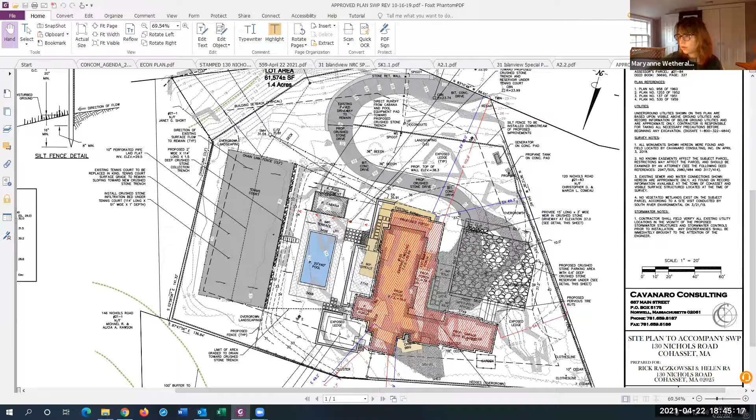What part of the porch and house was removed in the 900 square feet? Pretty much in this area, the house got narrower and a little bit shorter from this end, but it's essentially around the entire perimeter.

And you're also asking for a new well as well? We're applying to the Board of Health for a well, that's correct, for irrigation.

John, on your previous application, you showed the 2 beech trees which have been removed. There also is a tree line right where the well is being shown, which has been - that area has been cleared. And there's also a large swath that was cut, I think for electric, although it must be the biggest electric line in the world because they cleared about a 40 foot wide path through there, which we don't have any record of trees on that slope. Do you have any record of the trees that were where the well is?

I can actually defer to Sean to talk a little bit about the landscape. Sean, if you're there - yeah, I'm here. Sean Papich, Sean Papich Landscape Architecture, 222 North Street, Hingham.

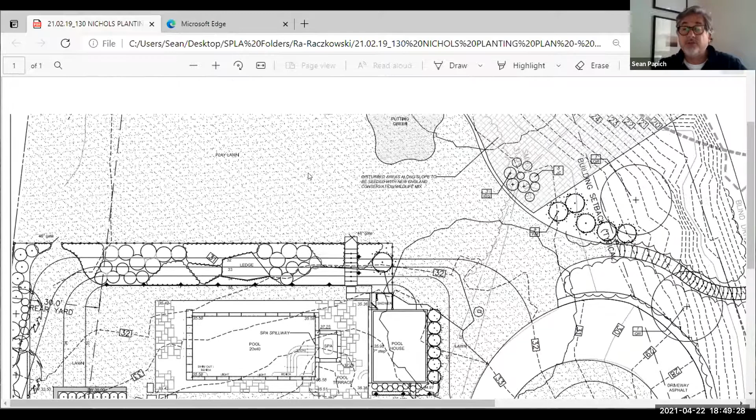We have a heavy amount of vegetation we're placing between us and the neighbors downhill, as well as plantings, and I can also jump to some of the other plantings we're doing around the house. This particular plan covered areas that were primarily around where the old tennis court was. The intent was to show some of the vegetation going along the hillside, where some dead trees were removed and some invasives were removed.

There were some Norway maples pretty close to the street that we met with Andy Swanson, the tree warden, about, and he gave us a go ahead to remove a few of those down near the right of way.

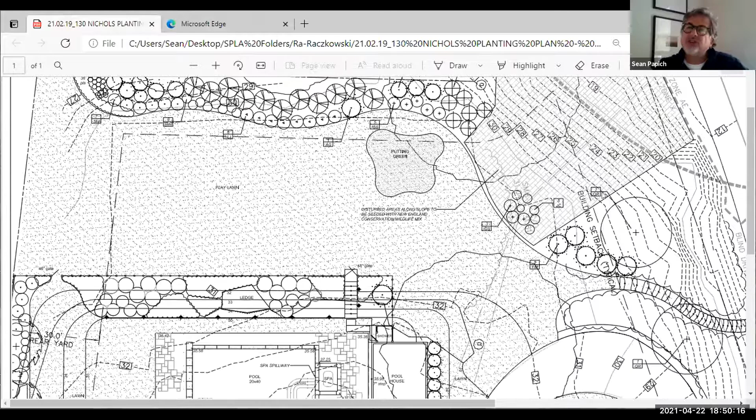We were actually going to vegetate this very heavily with native grasses and wildflower mix, as well as other shrubs. We're also going to add back red maple and two red oaks into this little area. You can see some of that along the driveway.

Existing driveway, as John said, stays generally the same as what it is today. Any areas that are disturbed right on the edges are going to get revegetated.

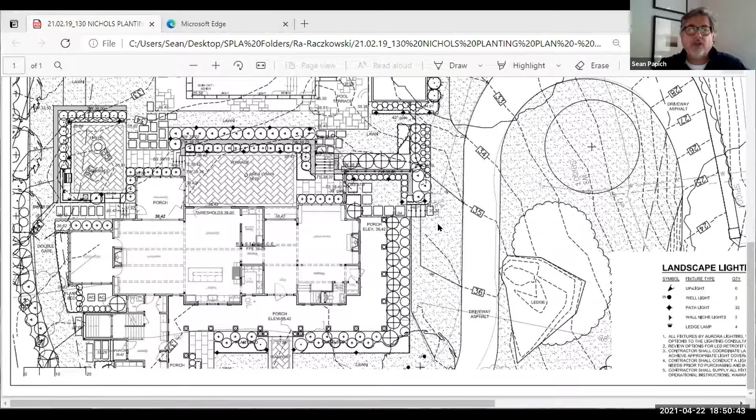Speak to - you wanted to look at the other plan that we've got that is right around the house also. See if that comes up.

That's again where we were looking around the pool area. The tennis court is up top. Sean, just to interrupt you, you may have to back out and come back in because we're not seeing the second plan. How about this one? See it now? That was the first one. Yep, this is the second one now.

Okay, thank you. So this is where it gets cut off. There's a lawn area now instead of the tennis court. And to the sides of the pool in this flatter area, we've got this heavily vegetated slope.

Vegetation around the house - I'm not sure if you really want me to get into a lot of specifics of the vegetation right around the house, but it's typically right around the house. And we'll see if I can show you.

We were going to add some more plant material along the buffer right here. So you can see where we're going to add vegetation along these edges. Existing tree that stays here, other existing vegetation along this edge.

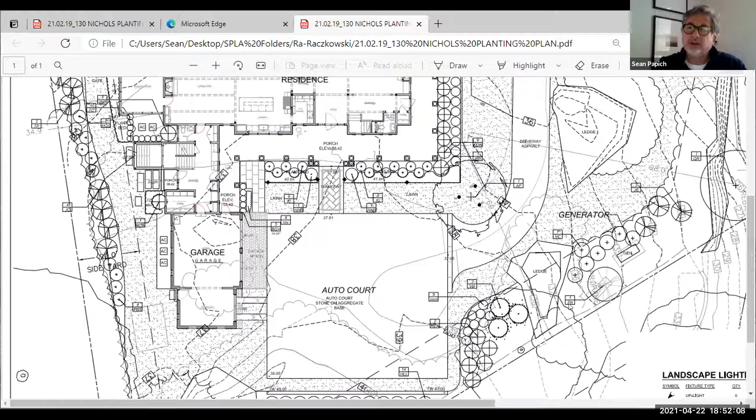Again, Chris, I think you were talking about where the well was proposed is right here. Yeah, I mean, my comment really goes to the vegetative buffer between the house and the road, which has been disturbed considerably.

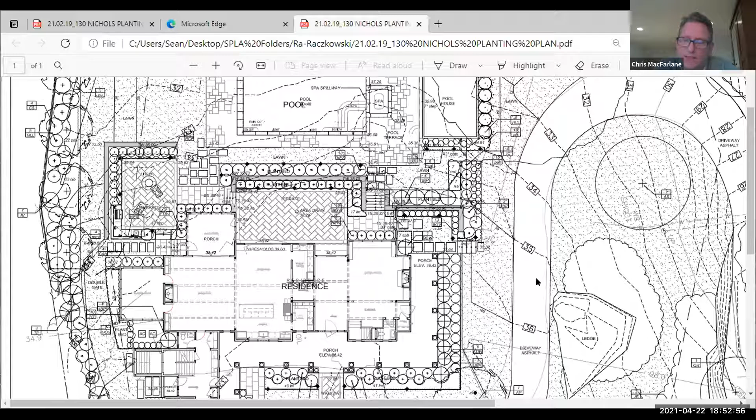There are signs that front edge has all been blasted. You're showing a tree line there, which doesn't really exist anymore because it's all been blasted out. And I think if any area this property needs to be properly vegetated, it's that particular face.

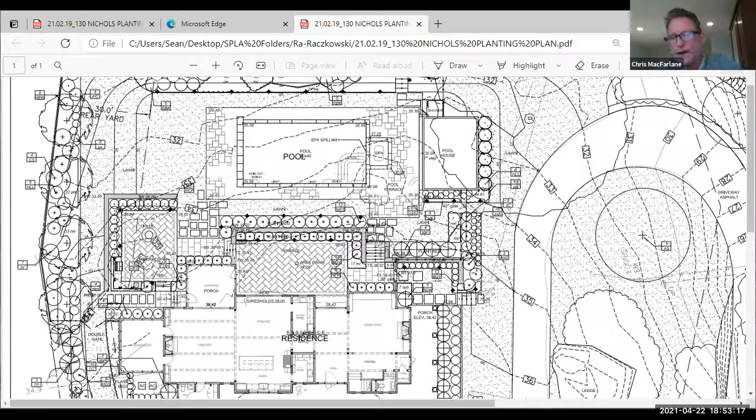You know, the original permit had the beeches. I understand the condition they were in - I think I even mentioned to you at the time you shouldn't count on them. But you've lost those, and as I said, it was an amazing swath that was cut for what I believe was just electric. I may be wrong, but I think for sure that attention needs to be paid to that, and that's just the comment.

I'm going to kind of leave it at that. Oh, I agree, actually. I do believe we should come back in here and add some additional vegetation now that the electric came through and created kind of the large void that's there. So I do agree with you - we would intend to come back in and revegetate along this front side now that that's happened.

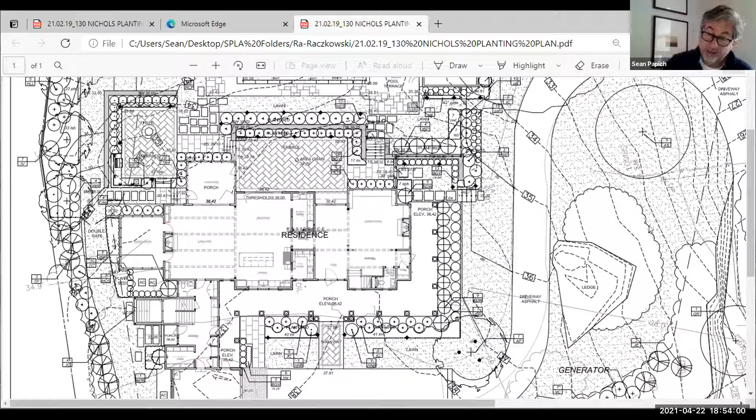So, John, going back to - I'm sorry, I shouldn't jump around, because if other people have questions about landscape, I'd like them to have it. But after that, I'll jump back to the stormwater again.

Do any commissioners have questions about the landscaping? No, thank you.

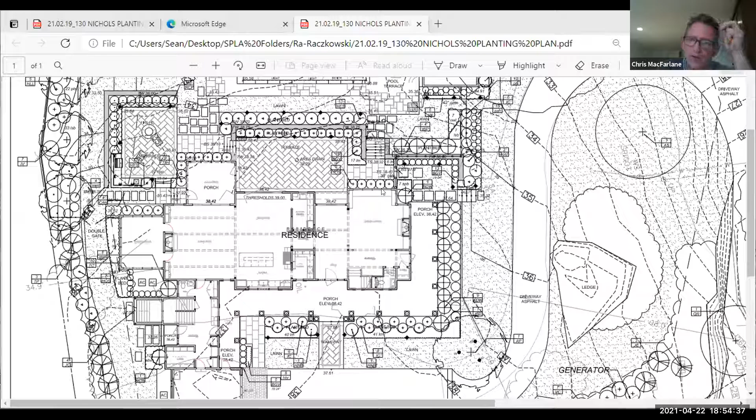So, John, my question is this: the area of impervious surface has changed from the east side of the property to the west side of the property and the south side of the property where the entry road is. Can you explain where the stormwater is now going?

As you recall in the first application, the intent was always to try to reduce the amount of overland flow that sheeted off to the north onto the adjacent driveway that flowed down towards the wetland offsite. So now we'll maintain flow toward our property. We're going to have a series of catchment points at the low point between that vegetated buffer that Sean mentioned at the pool and the new lawn area where the tennis court was. That will be graded towards the pool, captured with some yard inlets, and then go through an infiltration system and then continue to flow and connect to a catch basin in Nichols Road, which is what we always intended to do after talking to the town about making that connection.

The idea is to reduce the amount of overland flow and sheet flow rolling down the driveway and coming off the site and over the ledge. Similarly, the house will be captured and sent to this infiltration system in the back, and the front half of the house will run to a series of manholes that will then connect and flow down to the offsite catch basin. So essentially, there's a large reduction in overland flow, and what's now being channeled to both a piping system with an infiltration area at the toe of the slope, and then on to the catch basin offsite.

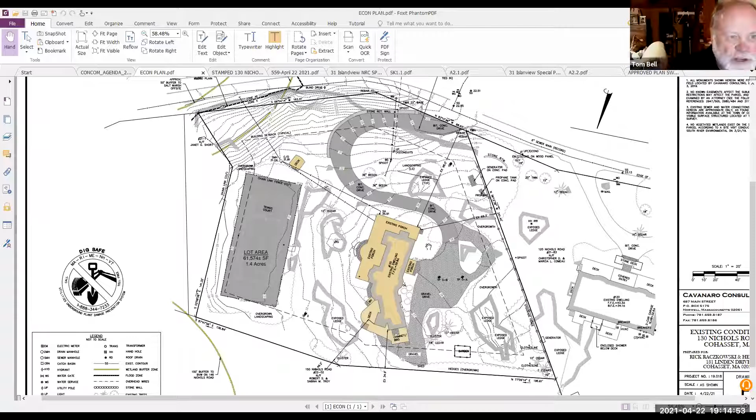How many square feet is this? I can't see it on there. I'm just wondering about the residential area of the house itself, or even the footprint. It looks like a big house to me—it's larger than most homes that seem... it's a large home, like a lot of homes in this neighborhood.

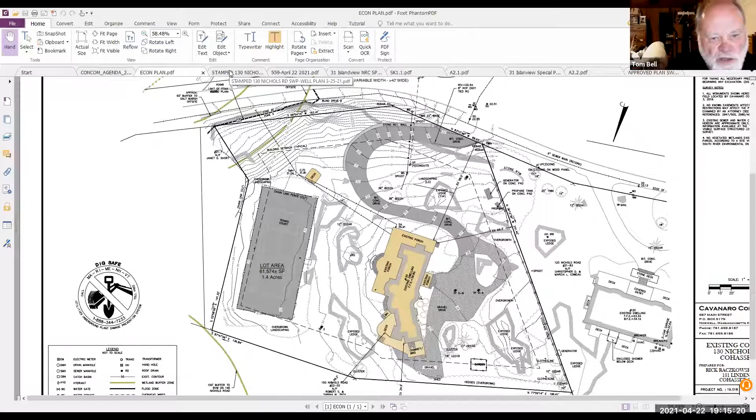Has it gone through large house review? Yes, it has—we're talking about an amendment to the stormwater permit. It was approved in 2019. I'm not asking whether it's approved, I'm just trying to get some notion of how big it is. So if it's gone through large house review, it's bigger than 3,500 square feet, right? Yes, that's all I'm trying to get at.

John, I understand your contention that the bylaws ask for a reduction, and I understand you've met your burden. They don't ask for a reduction, they ask for no increase. All right, fine, that's important. Because if you read our bylaws, it talks about all kinds of things like on-site disposal and everything else, but we don't really push that—we do look for no increase. And I've just acknowledged that to you, John, so don't get pissed at me, all right?

I'm not pissed at anybody. You're completely pissed off, you showed it through your voice, and now I'm trying to just ask a very simple question. I'm not upset, I apologize. There's a swath—well, I am, okay?

This happens every week. Whoa. Listen, come on, guys.

We've got a swath that cuts through this area. I have no idea how big a trench this was. I'd like to recommend, if it can help, a break in this grade with potentially a gravel infiltration trench halfway down that might infiltrate some of the water people are concerned about running off the property. I'm not an engineer, but I've seen it done before. It's a completely barren piece of land. It would take a half hour to dig a trench and put gravel in.

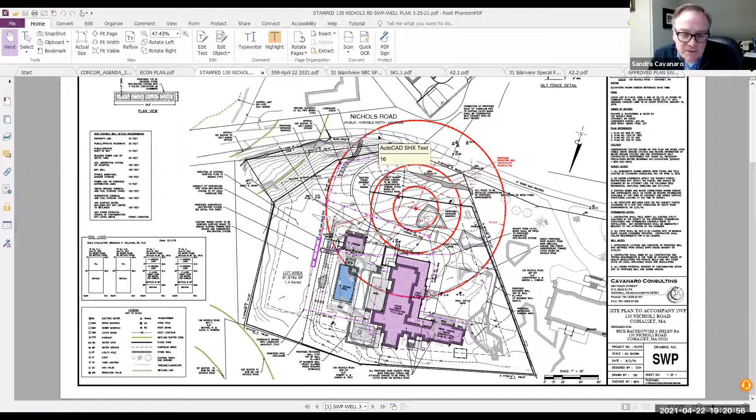We understand that, and we'll state publicly that we will endeavor to do that without hesitation. I know Helen and Rick are anxious to keep things moving. Quite frankly, we thought the removal of the tennis court was a good thing that would be looked at favorably, but they really want to keep things moving, so I'll speak for them and say we'll continue to work in that regard.

Chris, are you suggesting a driveway trench system by that? No, I'm not. I'm not anywhere near the driveway. I'm talking about the area that was disturbed for the electric line. There's a major slope right here, and if anything can be done to help intercept the water as it goes down, I think it could be a great positive.

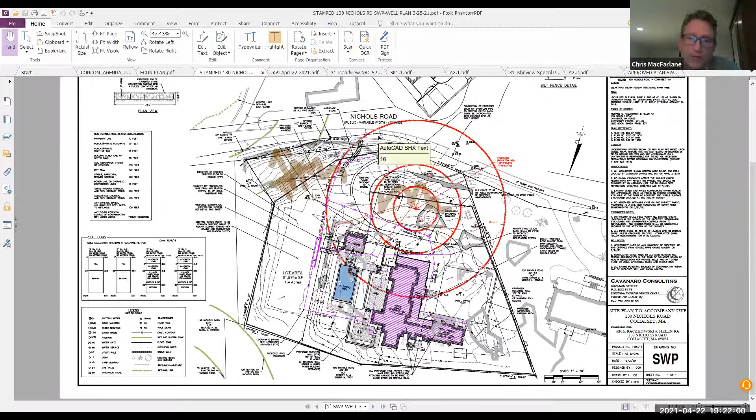I think this area here and this area need some serious vegetation. Those are the two items that I think could really help this project, and I think that could be done. Neither is required, but I highly recommend them.

I think that's possible to do, Chris. I don't think that's an issue at all, especially if it was going to be vegetated. To John's point, if there's something else we could do, perhaps capture some of that water with some crushed stone within that planting area we're already going to be planting. And the disturbed area coming straight down from the house to the street, if we're revegetating that, we can do it at the same time. Yeah, shouldn't be an issue at all.

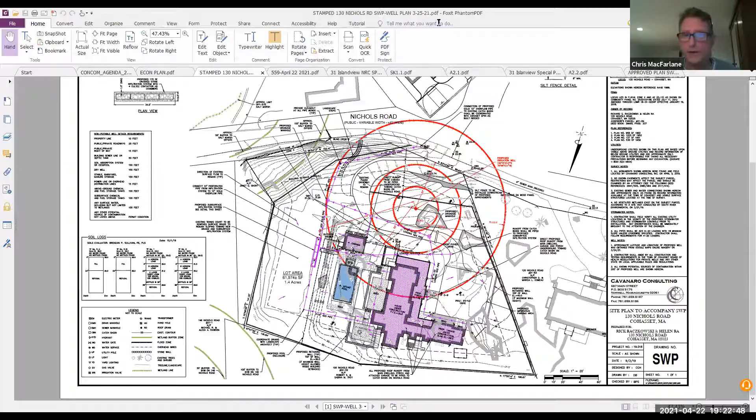Jeff, is there anyone in the audience who's raised their hand or asked to comment on this? No.

I will say that we did meet with the downstream abutters last week to go over the plan with them. They asked us some questions, and we offered to go out and meet with them in person and walk the site and explain the plan, and they appreciated that. Does anyone else have any further comments?

Jeff, this would just be a motion for an amendment to the stormwater permit, is that correct? Yes. Would it carry an order of condition for what we're asking, or just? It's not really an order of condition because we're not conditioning it. We're recommending it. It's an order of recommendation.

Would someone like to make a motion to amend? Mary Ann Weatherall would make a motion to recommend amending the stormwater permit 1923 at 130 Nichols Road, that we amend the plan, and that the applicant has agreed to make some modifications to help reduce runoff where possible, and that the plan can be shared with our conservation agent at some point.

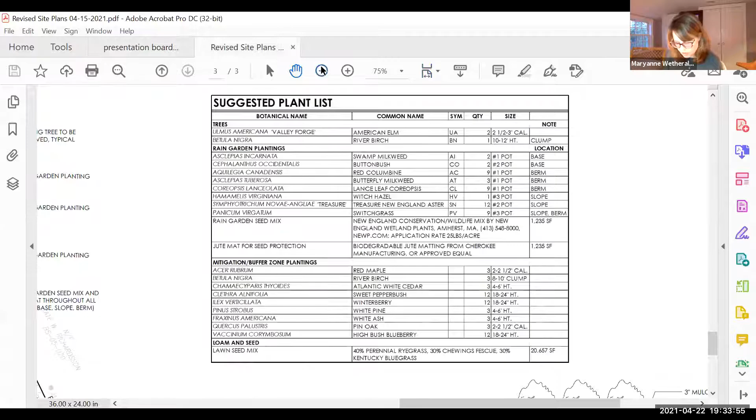All right, thank you. Maryanne, you're saying those do not show up on the existing condition plan? They do now. I believe on the initial plan that I had, the existing plans I had before, I couldn't tell if it was there or not because everything's so lightly drawn, or maybe it printed out from my document. But I just wanted to address it if I had seen it.

But you say there's only 2 trees coming down? Can you guys see this plan now? Mature tree. Okay, great. There's a 36-inch pine here, a 36-inch elm, which I think is mislabeled, that should be an oak. And then there's a 48-inch pine there. So those are the main ones that would be removed. Wait, that's in the 50, so that would stay. So it's mainly the 36-inch pine, 36-inch oak, and then there's a 24-inch oak there.

And this clump here is the birch trees that you had spoken about. So the 12-inch birch, the 12-inch oak, and the other 12-inch oak, and the 56-inch oak are all staying? No, those will be removed as well. I was just speaking to the larger ones. The 56-inch oak is outside the 100.

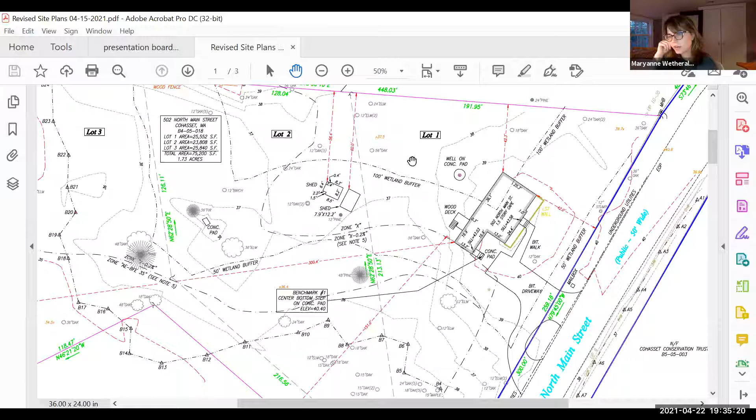With the concrete pad that you say is there, what is it like when you're out on the property? It's concrete, yeah, it's just a remnant concrete pad that was there. Maybe it was a dog kennel at one time, but that would be removed. Okay, so the house is behind the concrete pad, looking at this drawing. Right, looking at this drawing, the house is in this area right here.

Thank you. So there'll be hand removal of all the trash as well, and the tires that you're talking about as well. Yes.

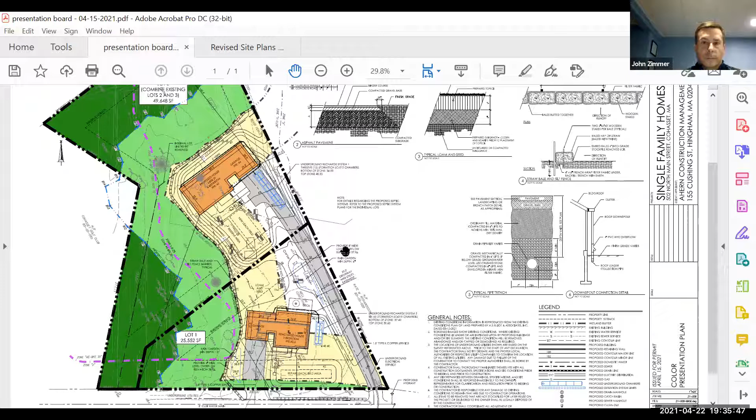Another thing, I just wanted to be clear, are you using the existing driveway as the new driveway? There's a driveway that goes to the right of the current little house, and then it travels to a house in back. Are you using that driveway and then splintering off from it, or are you establishing a new driveway? Let me just double check here between the two plans.

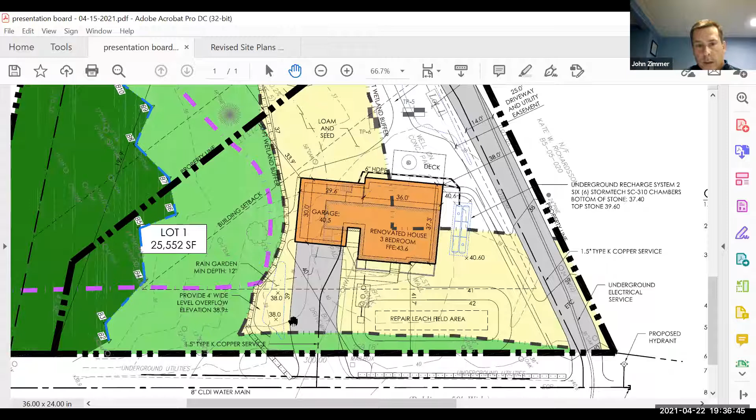So there's an existing driveway that basically has this little circular bump out. No, there's a driveway to the right. So they'll use the existing curb cut for the new driveway. Which is to the right of the north? Correct. So see this right here? That's the existing driveway. So it's oriented differently, but they're going to use the existing curb cut and basically discontinue that other circular part and remove all the pavement that's there.

And then the house in the back - I think she's asking if the house in the back is going to have a separate driveway. Oh, I'm sorry, I misunderstood. Yes, there will be a separate curb cut.

So if we look at the macro view of this, where's the other driveway? There's another driveway right next to the proposed driveway. So where does that line up? Okay, so this driveway here is the existing curb cut, and then there'll be a second curb cut at the edge of the lot. And then, I think she's asking, the next house has its own driveway on the right side of the property line?

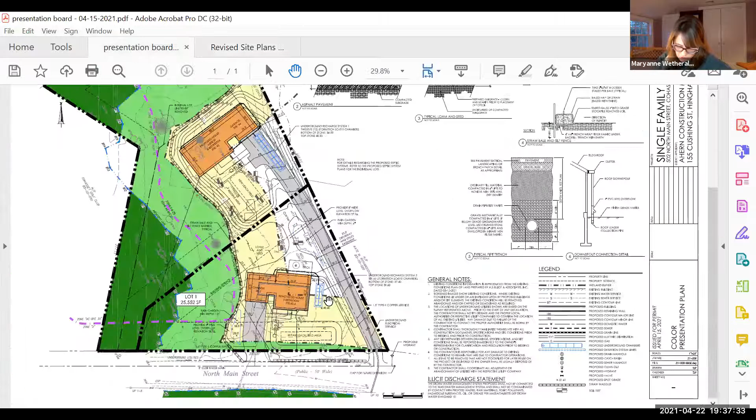I believe so. I don't know that I have... left side, I don't know if we have anything that shows it. Yeah, I'm not sure that that's shown. I'm just curious, is that driveway right next to your own driveway? Because then that's two pervious or impervious driveways right next to each other on a property.

Right, it may be, but the vast majority of that driveway is located outside the 100. I mean, there's a little piece here that's within the 100 right towards the end of it. But aside from getting an easement or some other alternative access agreement with the abutting landowner, they're hamstrung to some degree with access. And we didn't want to propose it over here because then it would be within the 50-foot.

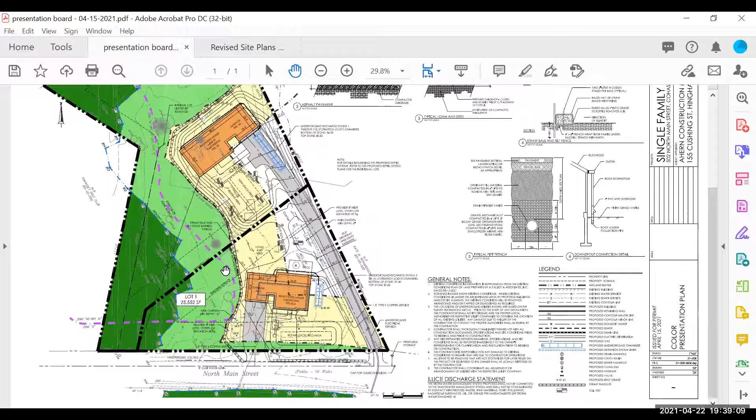Thank you. You're welcome. So could we have a look at the landscape plan?

Is there anything in particular you'd like to zoom in on? Just a general overview would be nice, but I'll tell you where I'm coming from. A very quick look at that existing condition showed at least 7 fairly sizable trees - 3 were at 12 inch and then 24, 56, 30 something. Those are all sitting between the 50 and the 100-foot buffer. So I'd like to see what's being proposed to mitigate for those, replace those.

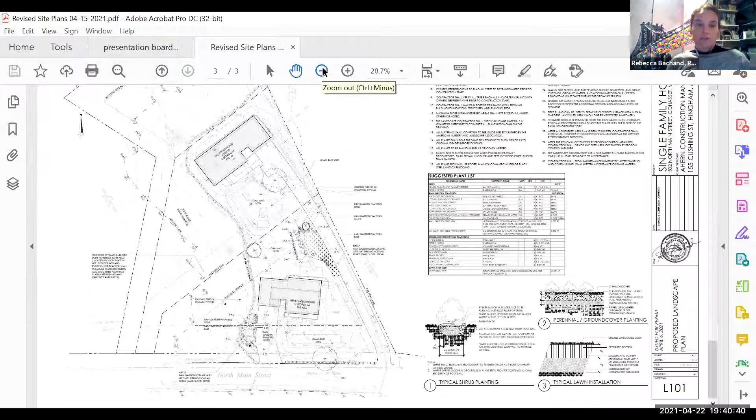Okay Rebecca, would you like to go over the plan please? Sure, for the record, Rebecca Bachand, RBLA Design. I'm a registered landscape architect helping out with this project. Because they're single family homeownership, we really wanted to keep the palette fairly limited because we anticipate the homeowner will want to do their own landscaping in addition to what we put. So that's why a lot of the disturbed area is simply a clean slate of lawn for them to work with. We did propose the 2 rain gardens with a rain garden palette of seed and a mix of shrubs and perennials.

That'll be native and tolerant of getting wet feet, and everything on the list, I believe, is all definitely native, and they primarily come from the Cohasset South Shore native plant list from your website. We proposed 2 large American elms and a large river birch within the residential area, and then the rain garden plantings, and then within the mitigation buffer zone plantings. That's where John mentioned earlier, we increased the size pretty dramatically of what we were showing before.

So now we're showing 3 2-to-2.5 inch red maples, 3 8-to-10 foot clump river birch, some Atlantic white cedar, 3 white pines, 3 ash, and 3 pin oak, and then a mix of native shrubs to infill this area, which we feel we'll just field locate with John after the cleanup and the invasive removal. So I think that'll let us interweave and not affect the existing trees out there.

Rebecca, given the disease issue with American elms, I'm just curious why would you recommend those? Because now we have some newer cultivars that are actually doing pretty well, so we had chosen that. I had red maples at first, but when we decided to put those out in the 50, 100 foot, I noticed the American elms on your list and thought we could go with one of the Princeton or Valley Forge elms. If the people I talk to certainly would not give the American elm a clean bill of health now, and there's so many other trees on our list you could substitute.

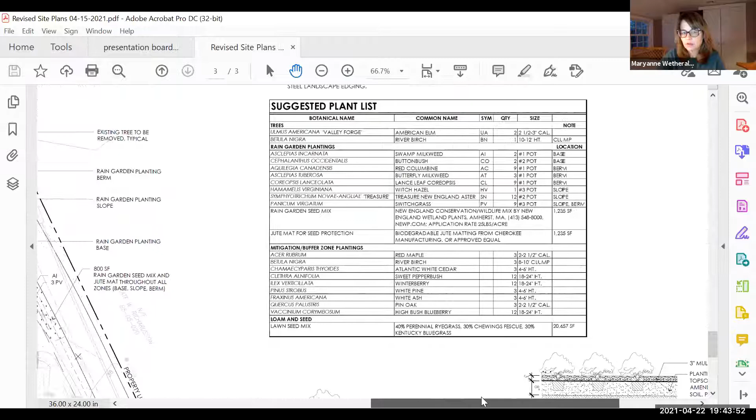Rebecca, what size are these trees that you're putting in, such as if it's not the American elm? I am concerned that you're taking down these two ancient oak trees. They look like they're in good condition on the lot. Yeah, so as shown on the plant list on the landscape plan, we have 2.5 to 3 inch caliber deciduous shade trees, a 10 to 12 foot height river birch.

Right now we just have the 3 in the residential area, and then down in the mitigation zone, we have 3 2 to 2.5 inch red maple, 3 8 to 10 foot height clump river birch, 3 4 to 6 foot height Atlantic white cedar, 3 4 to 6 foot height white pine, 3 4 to 6 foot height white ash, and 3 2 to 2.5 inch caliber pin oak, with about 3 dozen 2 foot height native shrubs.

Those aren't located on your plan though, are they? No, that's what I was saying. We will field locate them with John Zimmer as we do the invasive species removal. That way we won't impact the existing trees that are out there. We don't have a survey really showing what the understory might be. If there's something of value, we don't want to just put a shrub on something that's good and have someone not thinking rip out a great native species.

So these would all have to be hand planted. There'd be no machinery into the 50-foot buffer with these. Right. Okay.

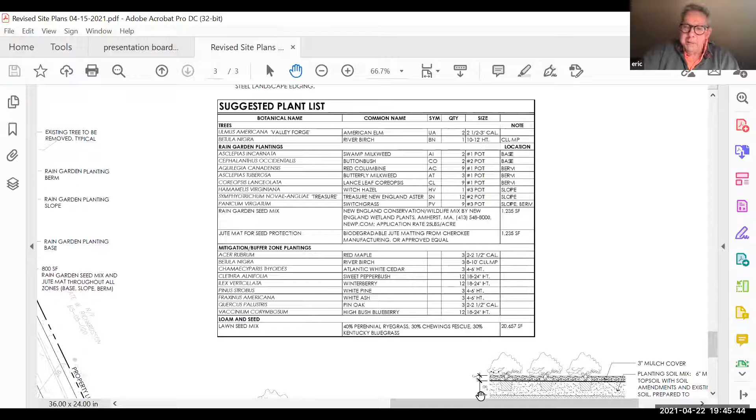Rebecca, I think maybe I missed your discussion on this. All the large trees, more than 18 inches, are they coming down because of the development work you're going to do? Yes, they have to come down because of roads, buildings, or construction. They're not coming down because you think these trees are not needed or not wanted on a new property like this, right? I'm always in favor of keeping trees, but because of the underground I just wanted to make sure. That's great. Yeah, unfortunately because of the underground stormwater and septic.

That limits us a lot, and it has such an impact to dig that much near the root systems of the trees. But that is also shown, the tree removals are shown on the landscape plan now as well.

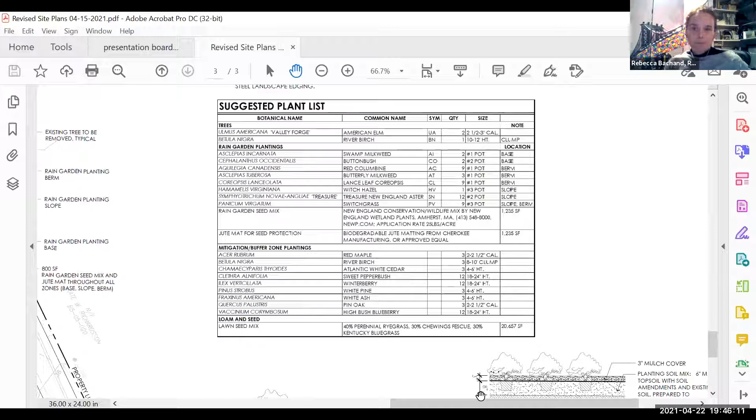All right, can you go to your plan again, please? Yeah, don't go out too far though, please. So the X's represent the removals? Yes. What size are those, Rebecca?

They range, I think the surveyor actually picked up 4-inch and higher. So they're 4, 8, 12-inch, and then the few really large ones that John mentioned. So I think that's where I have an ancient oak, I have a black birch, which I agreed to take, I thought was recommended to take down. I had an old beech tree and a stand of beech in that area. It just seemed like a lot.

Yeah, I think that's unfortunately because a lot of them are located in the septic systems for the houses. So that's why they're being removed. I'd like to see some more trees put back then.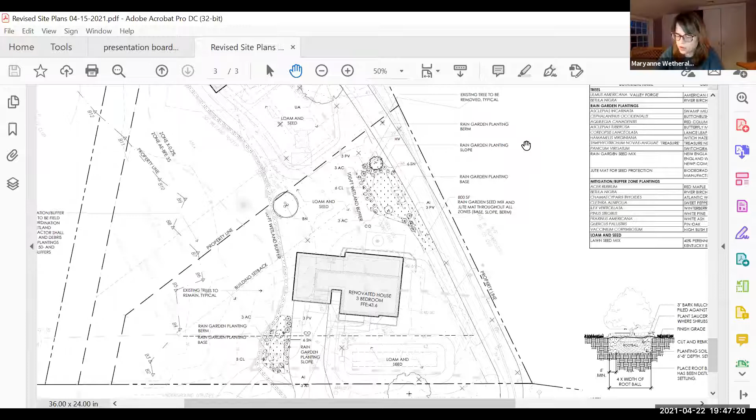Yeah, but that was a 56-inch, or at least labeled as a 56-inch, which is quite a tree. Right, but there were some of the larger trees that were multiple trunked, and I think when the surveyor was out there, they just kind of wrapped around all of the trunks and called it a 56. But there are definitely some sizable trees out there. I only saw one tree that had 3 trees attached to one trunk. The rest of them were single trunk, large, very mature trees.

So I would like to see some trees replaced, not of course in the septic system, but on the property. I think that's exactly why we added more larger trees, because that's what was said in the last meeting. And we represented that with Rebecca coming forth in this meeting.

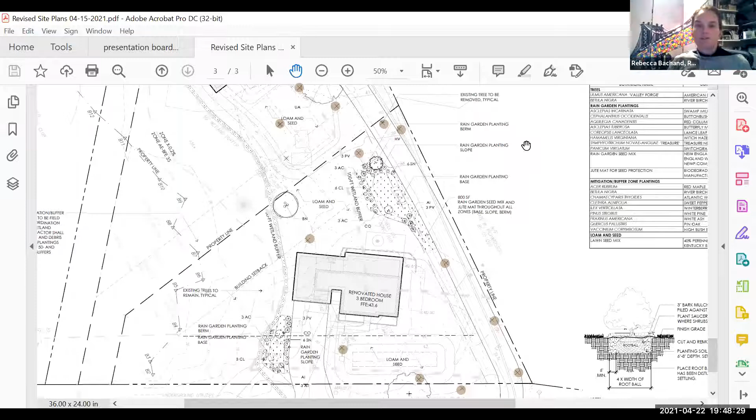So you're asking for additional, more than the last meeting? I think that would be recommended, yes. Is there a threshold you're looking for? I didn't see any mitigation requirements in your bylaw.

I'm sorry, before we answer that, can you slide down the page? I know my dots aren't going to move with you, the other direction. I'm sorry, I wanted to try to see what we had. Sorry, I'm going to clear this. I had 13 up until some point.

I don't think we had 14, so it's 50 foot, and then 15, 16, 17, but yes, several of those are outside of the 100-foot buffer. So this one, this one are all outside the 100. These two. No, we understand. Okay.

Chris, is that you putting the dots down? It was me putting the dots down. I didn't know where they came from. And it's me messing them all up after he put them on there. Sorry, no, I had put them down, and then when the page moves, they don't move with it.

I believe I counted 18 trees coming down, even though some of them are outside the 100-foot buffer. If you said two-thirds of those are within the 100 to the 50, I think that's a fair number for what we'd want to see.

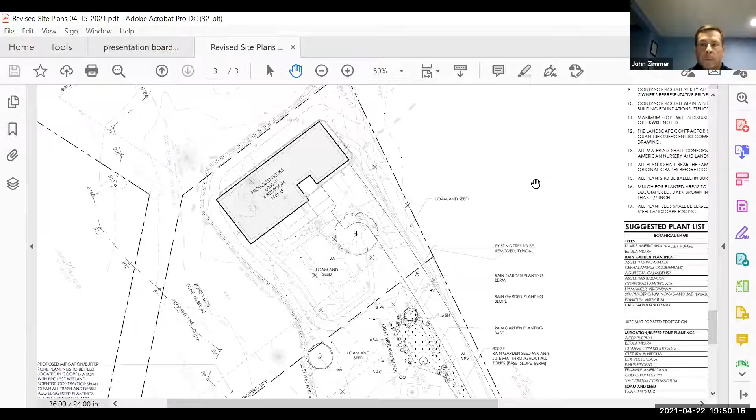Well, you're pretty close to that, I'd say, right? Rebecca, I think there's a total of 21 trees being proposed. 21, okay, right, so you're pretty good then. Lucky for you. 18 coming down and 21 being replaced.

I believe it was 23, isn't it, Rebecca? Oh, you're putting me on the spot. Wait a second, let me add. 18, 21. Yeah, and that's what we heard in the last meeting, and that's why we added more trees and larger trees.

We have a large overgrowth in the wetlands as well that's shading the lot, so we also have to take that into consideration. Right, you are keeping the pine that's in the 50, aren't you? Yes, nothing's being proposed to be cut in the 50.

Rebecca, you said Cambridge has what kind of plan? Cambridge's mitigation bylaw is pretty strict and to the point. It's inch per inch replacement for every inch you remove, or you pay a fee if you can't fit the trees on your property. They have a very specific payment plan.

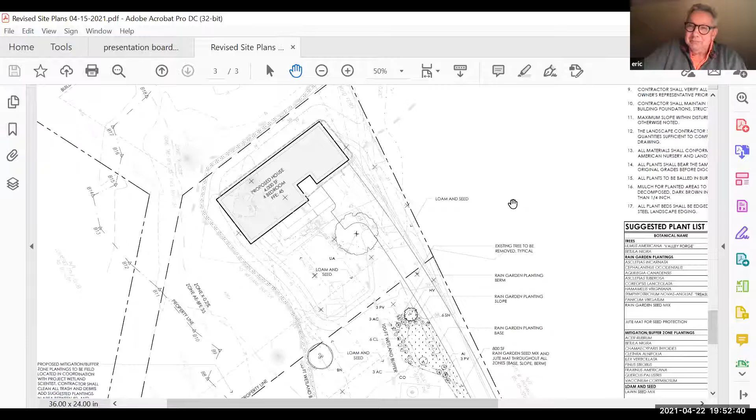I would hazard to say that yes, you are putting back trees, but they took 100 years to get to hundreds of inches, and we're putting back 21 trees that'll get to hundreds of inches probably much sooner than the previous trees did. Not in my life. Probably not in my life either, but probably not a good argument right now. And today's Earth Day, so in celebration of that, I'd probably like a little more trees.

All right, and we have no comments, Jeff, doesn't look like we have any other comments. No. All right.

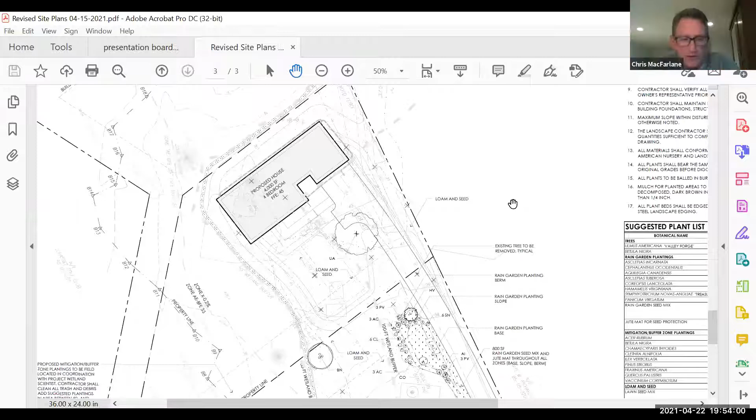Thank you. I think the only real order of conditions we heard is Eric's recommendation against the American Elm. I'd also like to add, Chris, as a condition that they make sure there's a cleanup of the 50-foot buffer zone, and that if they want to come in and remove any invasives through chemical means, they come forward with a plan that we have to approve.

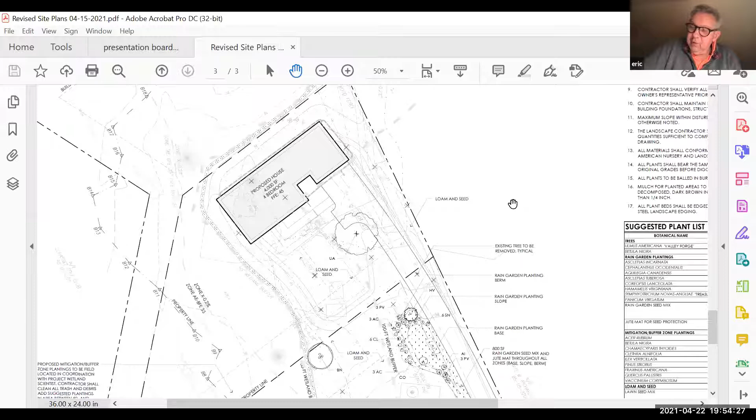If you think that's necessary. That's great, that's great. So we'll add that to Maryanne's motion. Do I hear a second?

I'll make a motion to issue a variance for work within the 50-foot buffer for the cleanup and mitigation planting, which shall all be done by hand. Do I hear a second? Second. Having heard a motion and a second for a variance for work within the 50-foot buffer, we'll take a roll call vote. Kathy Berrigan, aye. Eric Eisenhower, aye. Trish Grady, aye. Maryanne Wetherall, aye. Chris MacFarlane, aye. That vote passes 5-0.

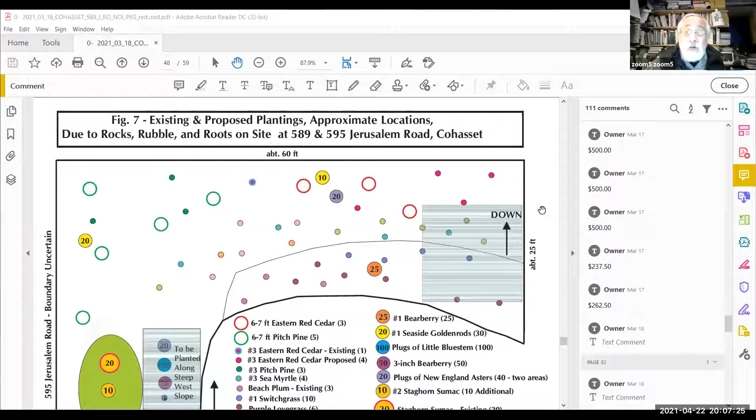Can you see that? Yes, we can. So this is a compendium of all the existing and proposed plantings with their approximate locations. Took us hours to put this together, with very different colors for everything.

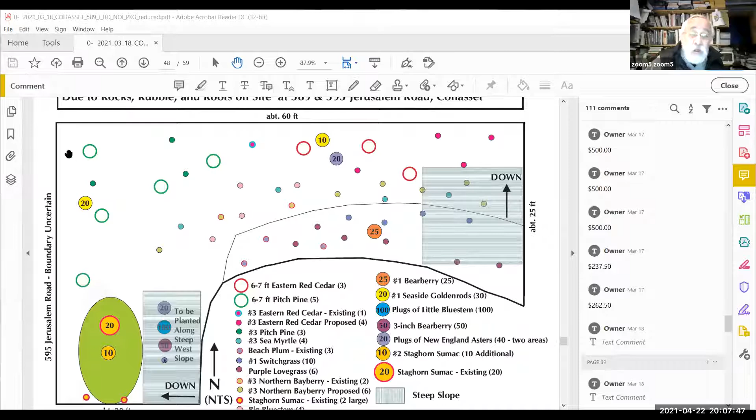So the easterly side is very close to the stairway over here, and the westerly side is on 595 Jerusalem Road. We don't have a location for the boundary line, I'm sorry to say. But you can go out there and see what's existing on that site right now.

You've got a lot of staghorn sumacs in this area. And then if I bring this other one over, the dark blue are living black locusts. There's some living staghorn sumacs, the green, and the dark blue are all what we want to get rid of, including other invasives like garlic mustard, mugwort, and the multiflora rose, of course.

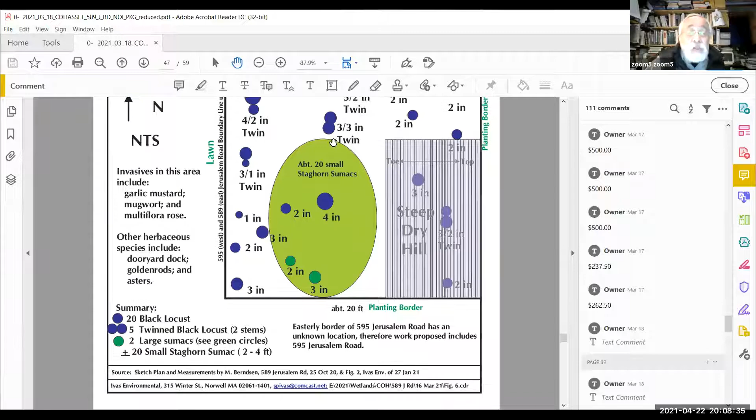And we'd like to put back what you see here. Do I have any questions? Steve, could you move your hand back and forth and tell us where the end of the riprap is?

Are you talking right next to the pond? So where your hand is the pond. Now, what about at the top of the bank? Top of the bank is right here. But it's not shaped like that, the planting area is shaped like that. It is, it's shaped very similar to that.

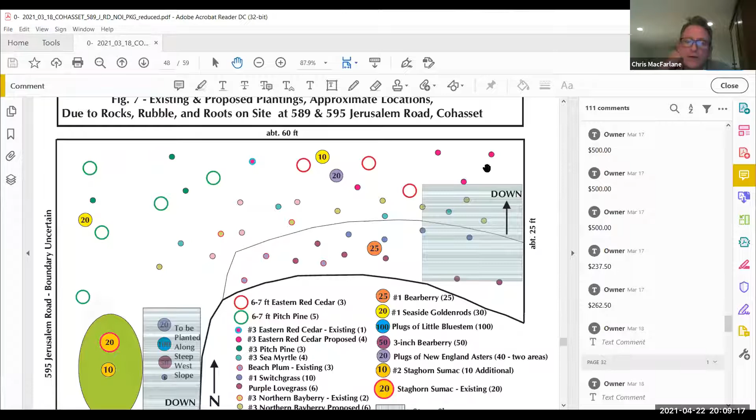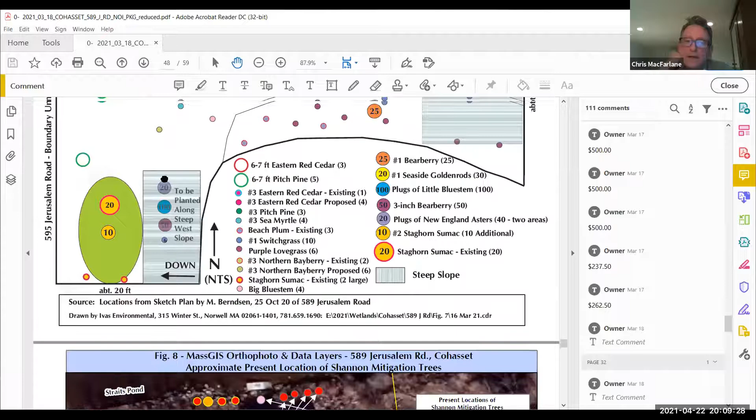So we're only talking about the north end, is that correct? This is the north end here. Okay, and it's about 60 feet. Let me think, it's 20 feet this way, and it's about 60 feet on this line here. So this goes right back to probably even with the garage, the stairs.

You know where the stairs are going down? Yeah, this is probably even with the stairs going down or thereabouts. Going down to the lawn. This area is lawn and rain garden right in here where my cursor is at this location.

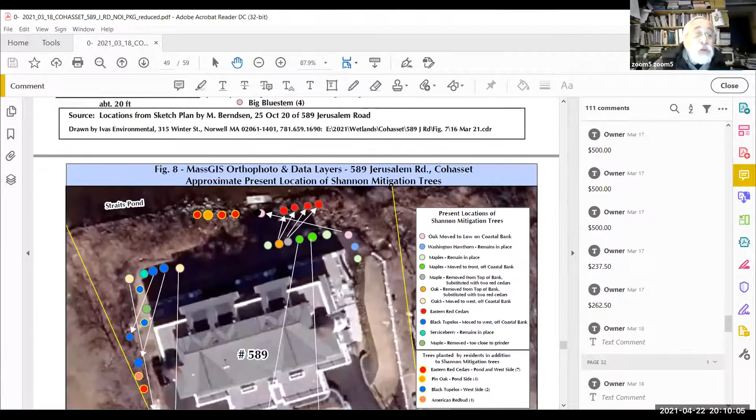In fact, I can probably show it to you over here a little bit better. That's that area right in here. And here, actually, here is the rain garden right in here, I believe.

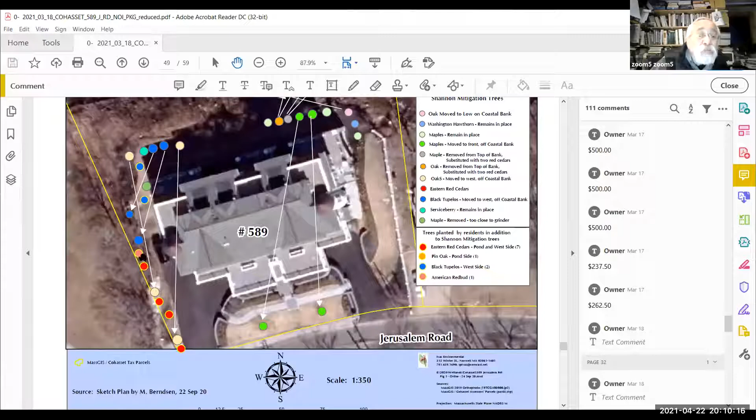If that assists. Steve, are you going to retain those staghorn sumacs? Yes, absolutely, why not? It's fantastic. Are they a native? Yes. Yes, they're very good wildlife food too.

These are the ones that have a great big red crest on them in fall? Exactly, yes. And if you find a bunch of them around, it's amazing, you'll see a very large one in the middle, and then you'll see many, many root suckers around them. Okay, that's how they grow on the highways. Yeah, that's how they take over the world. Indeed, I have some in my yard too, and I'm letting them grow.

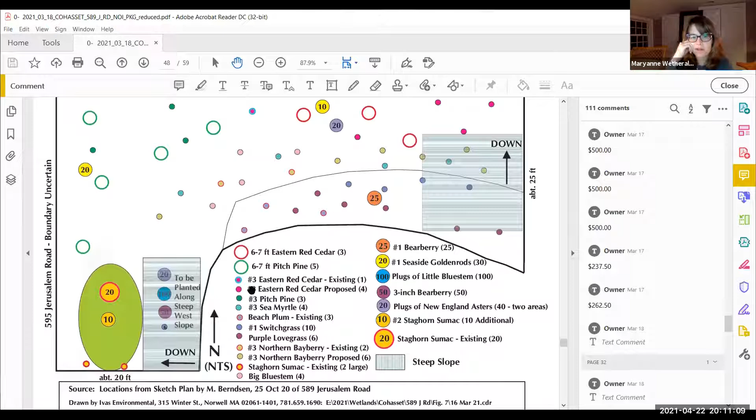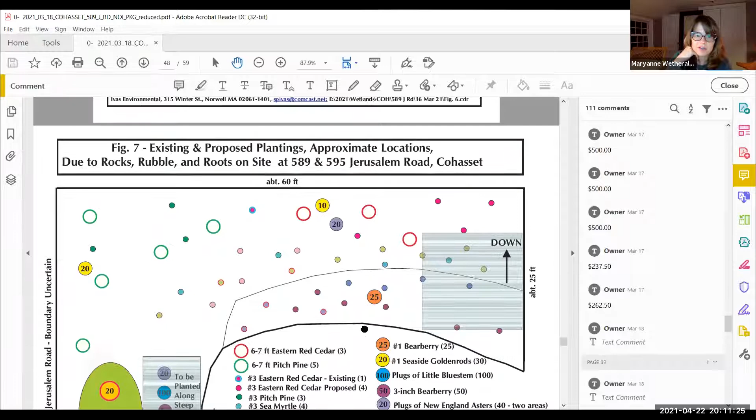Steve, I'm having a little bit of problems with your drawing. The drawing we're looking at right now, where is the house, where number 10 is about? Where the condo building? Yes, that's correct. This right here, number 10. Yes, oh right, no, I guess at the top of the page there's a 10. Right, the top, right there. Is that where the condo is?

No, that's the edge of the water. That's right, this is the edge of the water, this is the pond here. Okay, and this is where, well, if you go a little further to the east, over on this side, this is where the staircase down is.

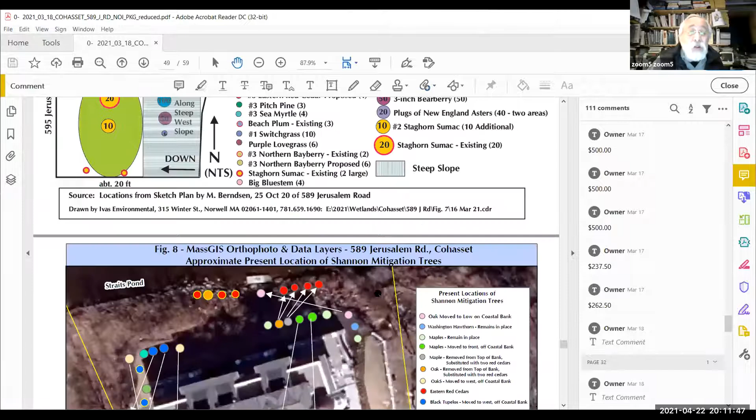Okay, let me show it to you over here. This is where the staircase down is, right in here. Okay, so we're looking at a section of the land, which is from about here over to here somewhere. You see this large tree here? Yeah, that's what we're looking at. It's sort of like an L.

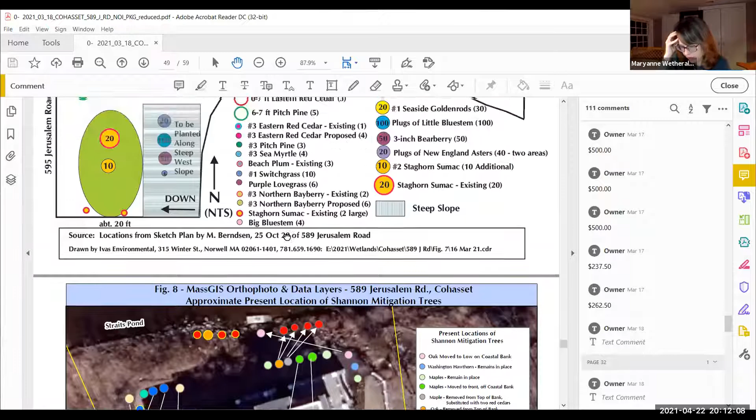And unlike past projects submitted to us of this property, I think it was 595, we are now adding 589. No, it was 589, and then we're adding just a little bit along the boundary. We don't know where the boundary is, so in order to take some of these away, the locusts, we are calling for part of these maybe on 595.

These right here. How do we not know the boundary line? Why? It hasn't been surveyed for this project. Oh, okay, simple as that. Simple as that.

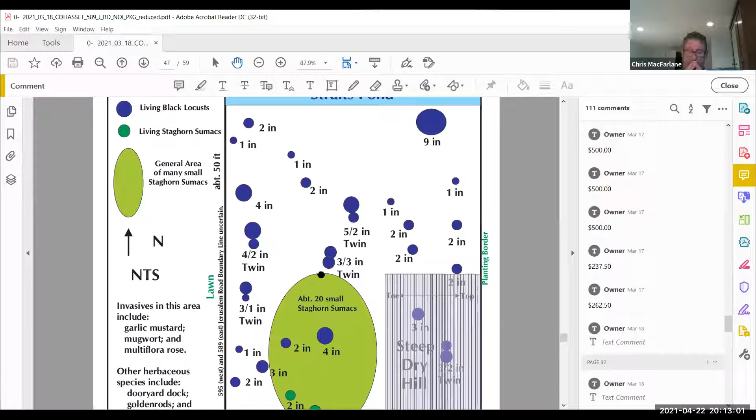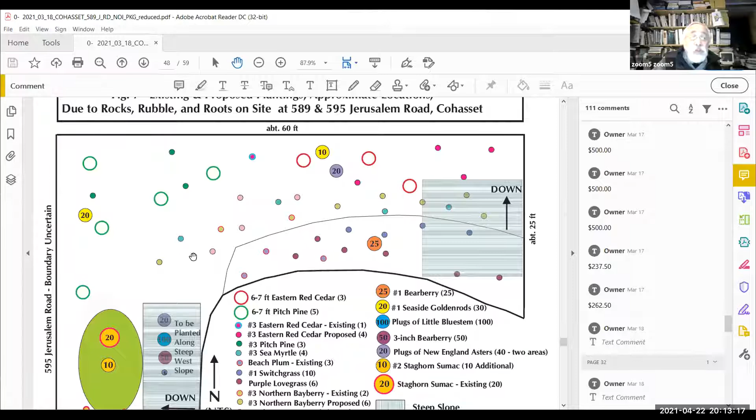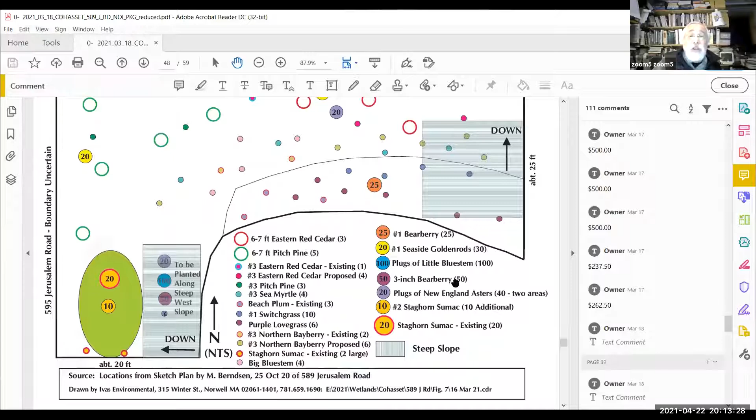Steve, what is the final outcome of this project? The final outcome is basically you see some pines and red cedars, a number of small shrubs in this area, and then a whole bunch of bearberry and other small grasses, blue stems and goldenrods and plugs of asters and sumacs. So the idea is to cover all possible strata, layers of this site.

Except near the top of the bank with trees, plantings, and shrubs, there are, for example, 25 bearberry going in this area, 20 goldenrods going in this area, and 10 staghorn sumac going in this area.

So what we'd like to do is cover the ground surface so there's no bare soil available for erosion or sedimentation down into the pond, and then have a structure of shrubs at eye height that are hard to see through for wildlife habitat, and then the pines and cedars a little bit higher as an overstory. The overstory will probably never reach the top of the bank, or very high above it, because of the winds. So basically coverage of all possible soil from an aerial standpoint, that's the idea.

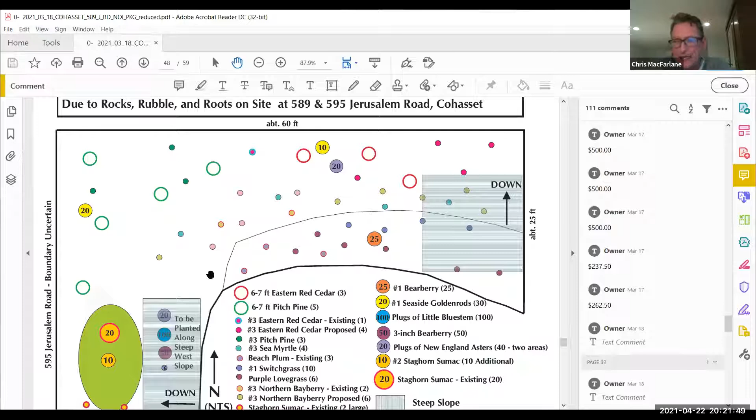I'm sorry, I wasn't aware. So if this is section 3, then why are we adding in another section? This is section 3, B, and C. But why are we looking at section 3 with an adjoining property next to it? I just feel like we should finish what we have in front of us before we add on.

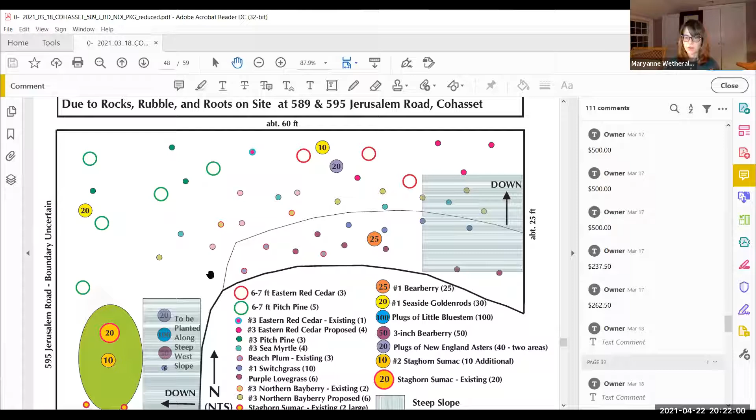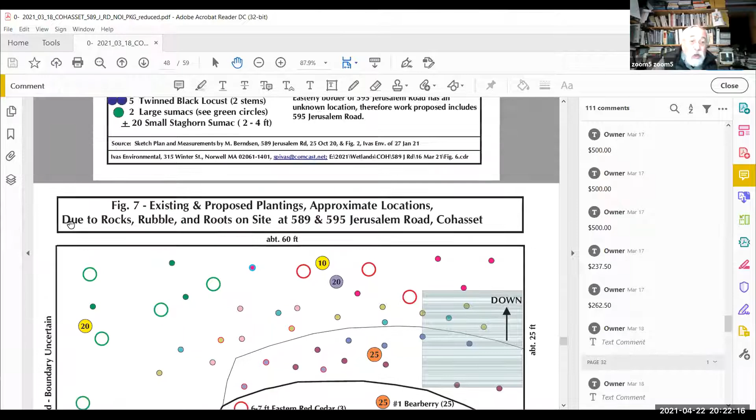Well, we are finished with everything up to this section. The boundary is just within a couple of feet here. We just don't know exactly where it is, that's all. And we'd like to take away some of the locusts right along the boundary here. That's the reason for the boundary issue. That's why we got the folks next door to say yes, please, we'd like to do that.

It's been expanded so they can get all of the black locust. If they expand a few feet to the neighboring property, they run the chance of finishing this project and leaving the black locust on the border that comes back in. So we don't want to leave those poisonous trees on the site. Incredibly poisonous for pets and people.

Got it. Okay. Yep. It's just a difficult plan to look at for me. It's not traditional. I'm sorry. I'm not sure how I could have improved it, frankly.

Well, you probably could have taken photographs and actually used real data to locate your plants. I'm sorry, I don't understand how to do that. Could you explain? Well, if you went out there in the winter, you can pretty much see right down to the ground. You could take photographs and use them as a base map, or have a base map drawn that located every rock and every planting pocket. I see, okay. We didn't locate the planting pockets...

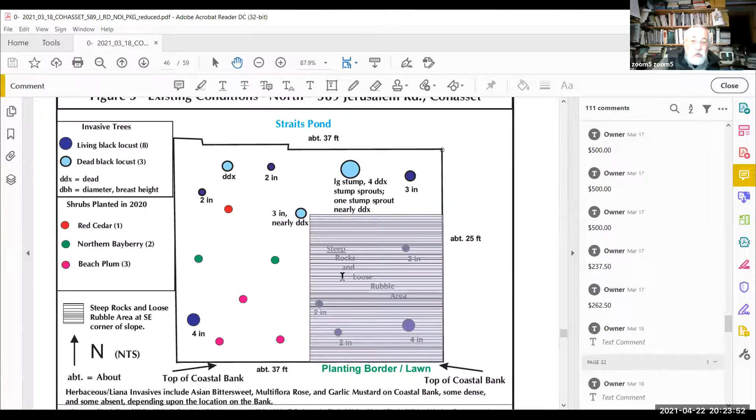Because that's something that we have to find once the invasives are out of there. That's the issue with the planting pockets, which was done on the east side. That's exactly how the east side was done and how it's successful today. So we'd like to just continue the program the same way, everything done by hand.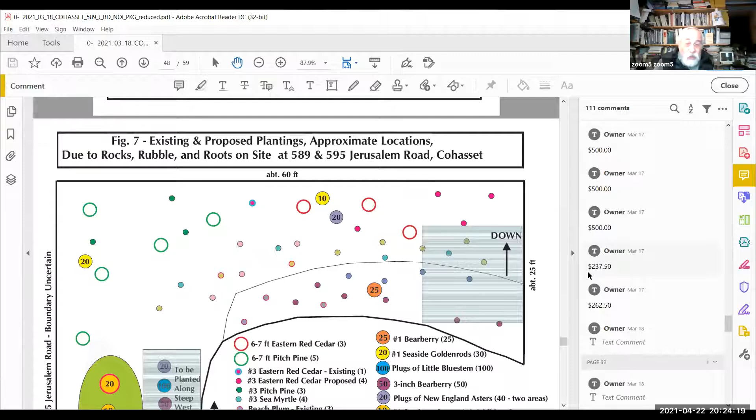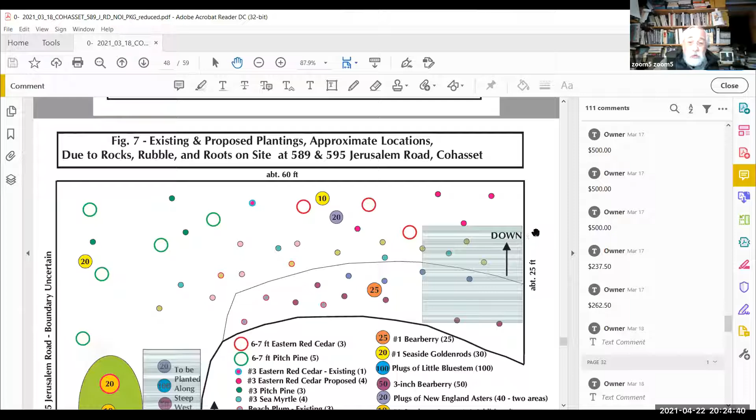I suggested that I would like to try to get at least an approval tonight to start removing the garlic mustard immediately, if not sooner. And then probably try to close this hearing tonight as well, so we can actually start thinking about removing the rest of the invasives.

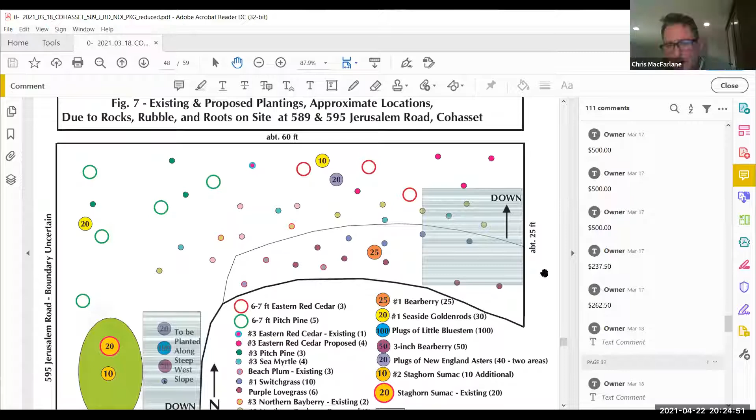Well, I'm going to make a couple comments. I've never really been in favor of this project because I felt that the applicant has always tried to kind of push this down the commission's throat. It's why it's here as an NOI instead of as an RDA, as it had been in the past.

We've always asked for a bit of time to see better how things were improving. And it's always been a bit of a negative for this project in the fact that there was a level of impatience that didn't want to slow this down.

I think this project continues to be a bit of a chance. We don't know, even if what's been successful for a winter or two winters has done well, what the end product's going to be is still a question. There's an amazing amount of plant material here, which I think is wonderful plant material.

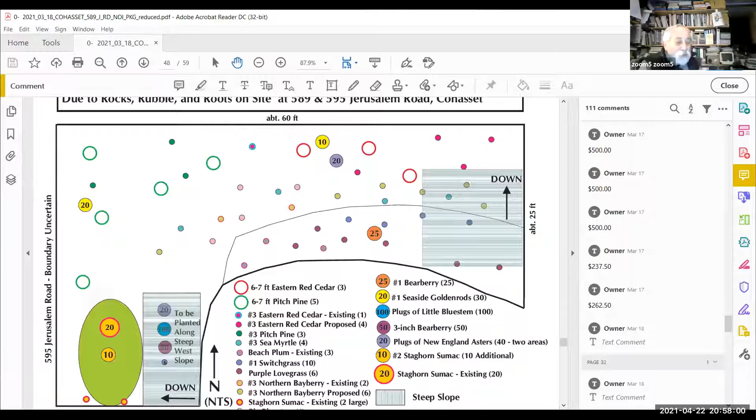I think that's it. Yep, that's it. Thank you. Thank you all. Thank you, Mr. Travis. Thanks so much. I hope we get out there at the end of summer and are amazed at what's taken place during the summer. We look forward to it. Thank you, Steve. Good night. Good night.

Okay, our next order of business, continued from February 25th, 2021, is RDA 21-02 for 15 Diab Lane, which is an alteration to a stormwater mitigation.

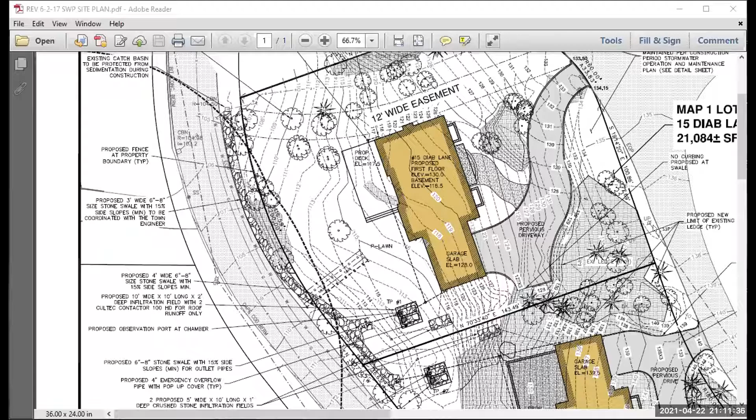once this project begins. And again, what's happening with the other? There are 3 lots here. So why is it only that we're talking about 15 now and not the other 2 as well?

So Elaine, I understand your concerns, but just to back this whole thing up, the purpose of this hearing really isn't to redeliberate the issuance of the stormwater permits. They're already in place, these stormwater mitigation features have already been approved. The only thing we're looking at here is this is an RDA filing, so it's a wetlands permit, and this dashed line here is the 100-foot buffer zone to a wetland, which is across the street and behind the house to the street. So the only thing we're considering here is the installation of this crushed stone trench in the 100-foot buffer zone.

So really the question at stake here is: is the installation of this crushed stone trench going to have an adverse effect on the wetland across the street behind the house over here? And 3+ years ago, when the first determination was issued, the answer was no. That's why the RDA negative determination was issued. That's only valid for 3 years. So they're coming back before us now with the same exact proposal to put this crushed stone trench in as part of the stormwater mitigation features. That's why we're only talking about 15 Diab Lane and not the other lots, because they're not within the buffer zone to the wetland. Okay, thanks.

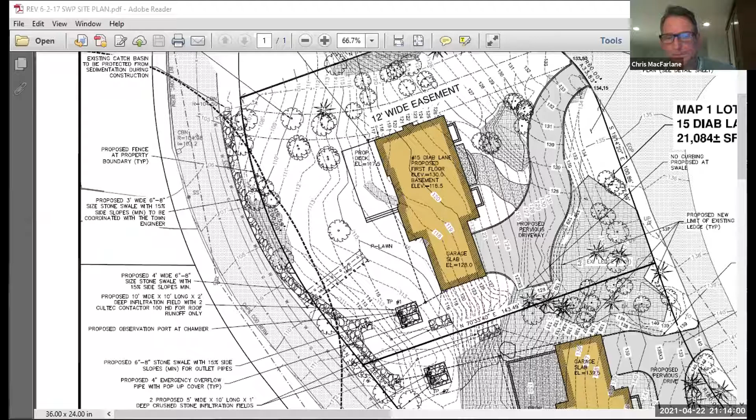Okay, thank you. I would point out that some things have changed. Ms. Breslow mentioned that 2 new houses at the top of the hill have changed the flow on Howe Road. So that's different. It probably hasn't changed anything with regard to the wetland itself. It would get back to that stormwater permit, which we're not relitigating. But conditions have changed.

Could we consider, since they may be building this soon, this trench, that we have some kind of environmental monitor to watch over it, just as it's being built in this 100-foot buffer zone? Yeah, that would be my job, or whoever the next person is that's going to come in to fill my role. That's their responsibility.

Well, Jeff, typically a schedule of work has to be presented to you, right, for work within a buffer zone? They have to provide 48 hours of notice before they begin to commence the work.

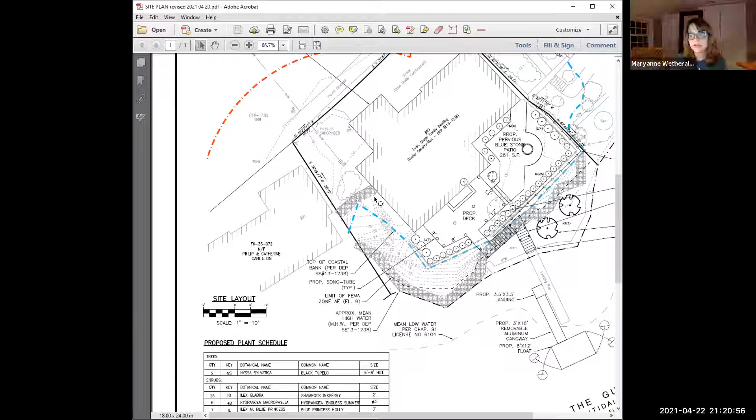Jeff, I understand they recommended taking down the tree. How would you stabilize the wall though? There wasn't any recommendation on whether, if you took it out, they'd take out the roots of the tree or keep it in. I wasn't clear on that. They're gonna leave the stump. The stump will remain, to stabilize the wall. Yeah, the wall is currently stabilized. The issue would be if you pulled that out, it could destabilize it. So the stump will be left in place.

Okay, Jeff, let me ask you a question. Over time, as the trunk and roots rot, will the bank slowly become unstable because of that? No, I don't believe so. You might get a bit of a depression that you'd need to fill in, but you wouldn't have a mechanism pulling that out from right behind the wall. That's where you'd get the problem.

So we're discussing whether to remove the tree or not. Is that what we're discussing, Chris? No, this was an NOI.

If you remember correctly, there was an NOI issued for this project when it was under different ownership. Under that different ownership, the whole backyard was cleared, and so this applicant has come back with a new proposal and requesting a new order of conditions. I'll say too that probably 95% of the work approved on the original order of conditions is already done, which was basically the removal of the old house and the building of the new house.

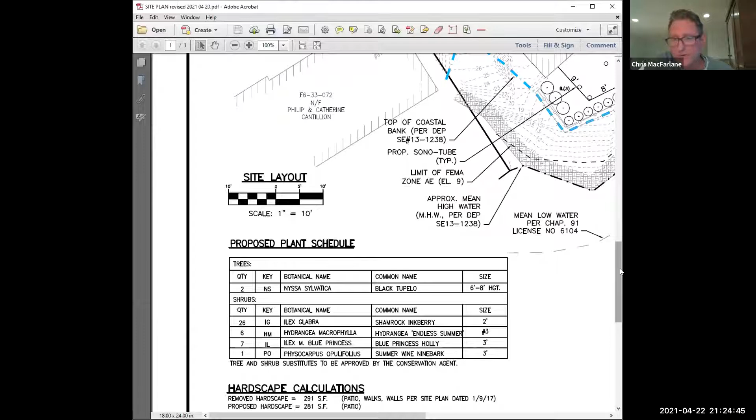Jeff, there's just two comments I'd like to make about this. The hollies — I'd love to see if you could put an extra foot on those, make them 4 foot instead of 3. They'll grow pretty quickly, but I know the neighbor has concerns, and it's short money to go from a 3-foot holly to a 4-foot holly, just to give them a better start. The other thing, you've got 7 hollies out there. It would be good if they were females, but 1 male, which will give you nice berry production — it's good bird food, and they look nice too.

Okay, so the females produce the berries? The females produce the berries, but you need 1 male to pollinate. Chris: Oh, are they pollinated by the shamrock inkberry, which is an island holly? No, different species won't cross pollinate. I was under the impression that all hollies cross-pollinated, but okay.

Speaking for the applicant, I think that's a very good request, increasing the bushes from 3 feet to 4 feet should be a minimal cost, so that's fine.

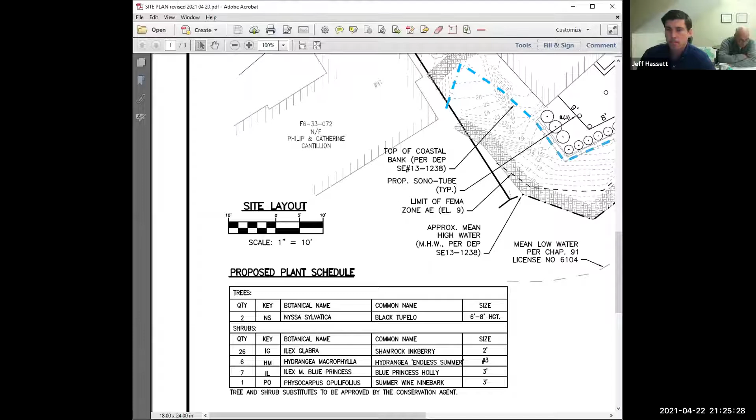Does anyone else have any questions or concerns about this application? If there are any comments from the public, you can make your comments to the question and answer.

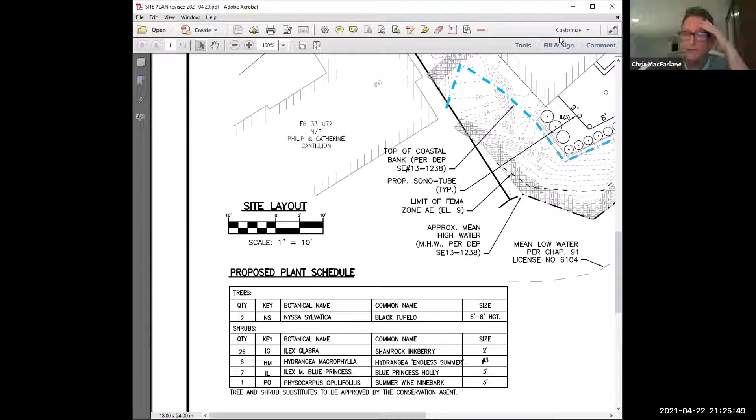Jeff, could I ask you to zoom out again, please? Only because I want to ask Jeff Summers a question. Jeff, because we're working on the coastal bank in the planting of these 2 trees, do we need a variance on that? Yeah, it's work within the 50-foot buffer zone. Okay, so it's all work within the 50, then. Okay, so we're gonna need to issue that as well.

Jeff, I had a question too, which I brought up last time, but I wasn't really clear on it. We are extending the gangway and the landing. So if they're doing that and applying for a Chapter 91 filing, does the existing pier just stay as it is, or do we have to adjust it to make it taller?

So the pier will remain the way it is. The only permanent modification to that existing pier is the 3.5 foot by 3.5 foot landing to attach the gangway to, and that's going to be so the gangway and the float are a permit issued by the harbor master because they're removable. That modification to the pier, just the 3.5 by 3.5, does require a modification to the Chapter 91 permit. But the pier itself — it's not the intent to do any other work other than add that portion to it.

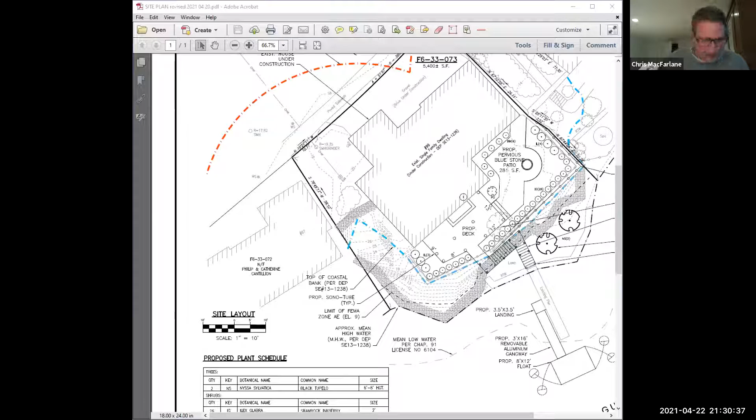I'd like to make a motion to issue a variance for work at 99 Border Street. Do I have a second? Second. Having heard a motion and a second to issue a variance for work at 99 Border Street, we'll take a vote. Kathy Berrigan, aye. Eric Eisenhower, aye. Trish Grady, aye. Marianne Weatherall, aye. Chris MacFarlane, aye. That passes 5-0-0.

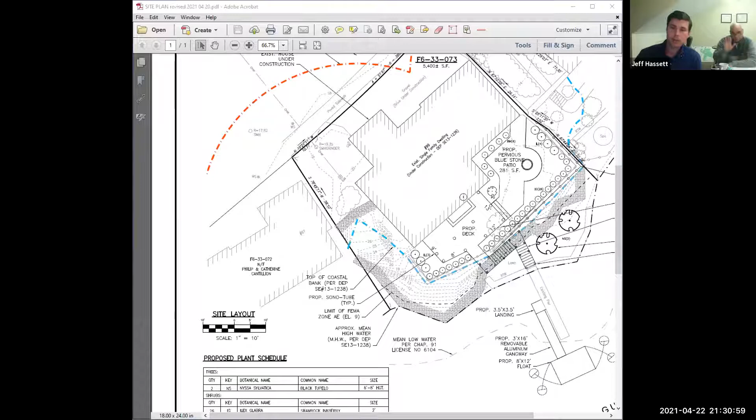Jeff, do you have a conservation update on your last night? No, nothing to sign, nothing to, nope. You have some paperwork you're gonna try to get done tomorrow, right? Yeah, I'll take care of all this tomorrow and get it in the mail. And then we're going to have to, you'll pass it on to John, whoever, so we get it signed in 2 weeks? Is there anything you need signatures on? No, oh okay, all right. Nope, just want to make sure. All right, no one came to you at the last minute and said close this out for me? No? Okay, so we're good. All right, excellent.

I have one thing. I mentioned a while back about meeting with Karis, our legal counsel, to talk about a few things. And I'm wondering if people are interested in having a meeting with Karis, whether to talk about procedure, bylaws, there's a couple fines that are floating out there. I don't know if other people are interested in having a meeting or not.